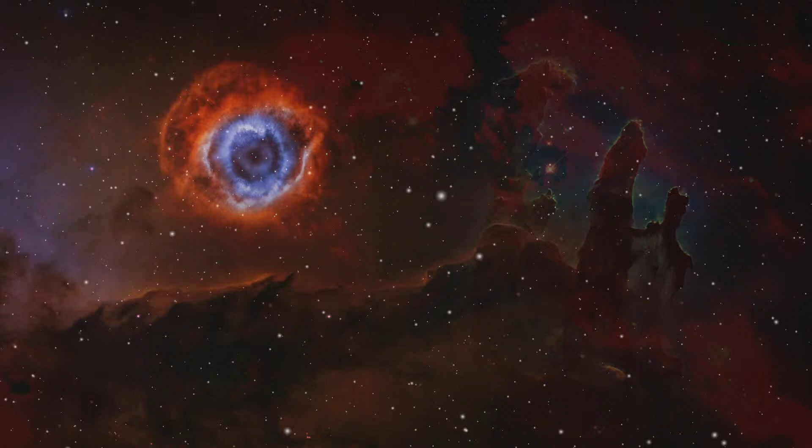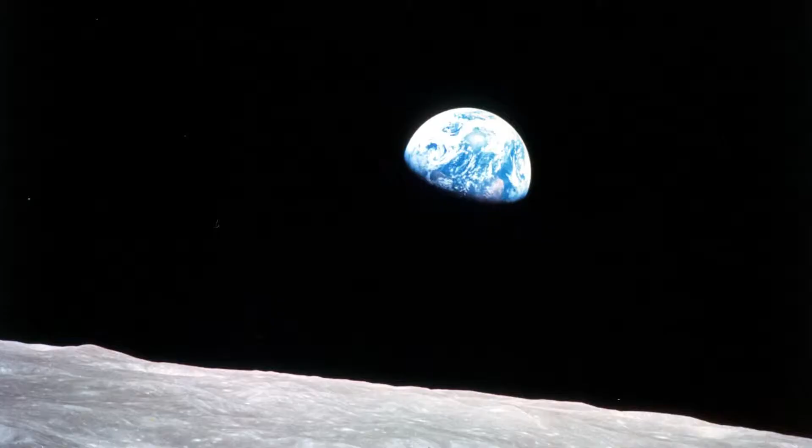This semester's 2110 competition, One Giant Leap, involved designing an autonomous device capable of consistently scoring the maximum number of points per round. There were 4 main ways to score points and win the competition: clearing foam rocks in the lunar module landing zone, preserving the location of the lunar module, placing a flag, and egressing from the lunar ridge. All tasks were to be completed in 40 seconds.

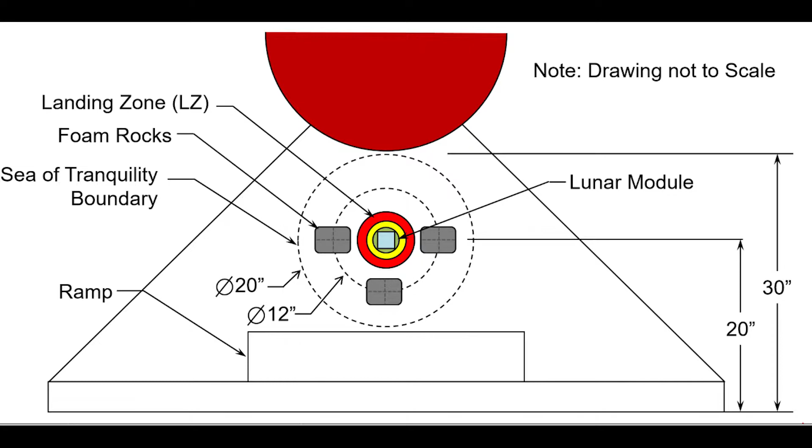The competition was scored using a point system with the breakdown as follows. Successfully activating the machine was worth 10 points. Fully clearing all 3 rocks in the Sea of Tranquility while preserving the location of the lunar module was worth 60 points. Successfully placing the flag in Zone 1 was worth 44 points. And egressing from the lunar ridge doubled the score obtained by placing the flag.

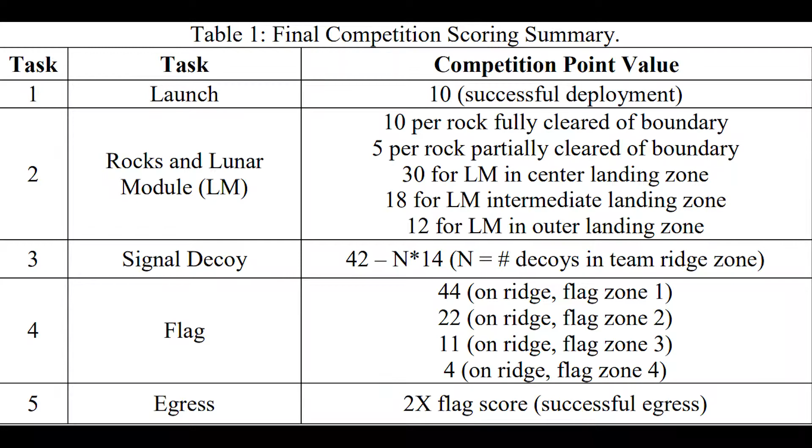Teams received a 14-point deduction per sensor decoy in their zone, but could not be deducted more than 42 points in total. If no decoys were placed in your zone, the highest amount of points a team could obtain was 200. The competition was completed on a 7 by 7 foot track with a 30 by 30 inch starting zone.

The initial state of the machine had to fit within a 1.5 by 1 by 2 foot volume and had to be activated using banana plugs powered by the track. The machine's power sources were limited to components in the mechatronics kit, which consisted of 2 DC motors, 2 solenoids, and a pneumatic actuator. 5 mousetraps and 5 rubber bands were also allowed, and the total cost of the machine could not exceed $100 beyond what was provided in the mechatronics kit.

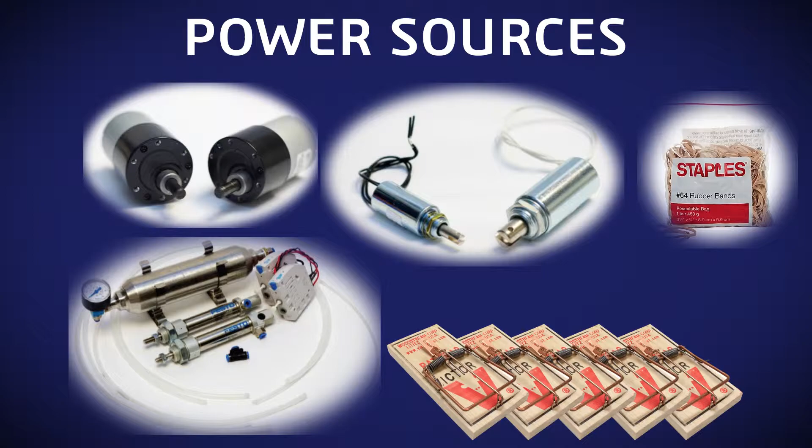The House of Quality highlights 2 very important customer requirements that will result in disqualification if not met: no track damage and starts and stops at rest.

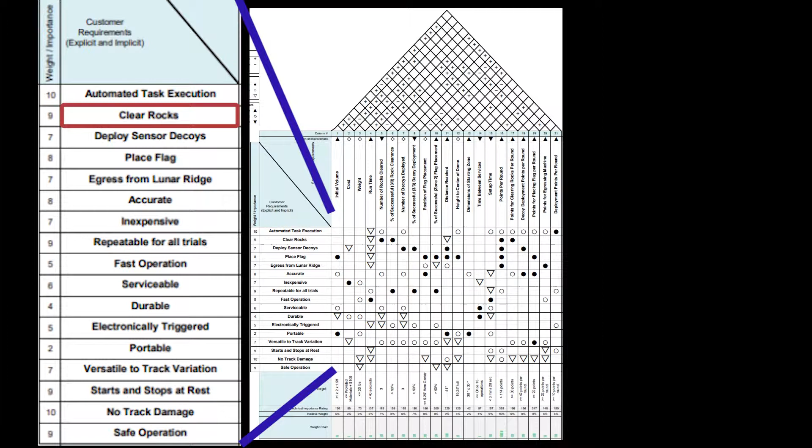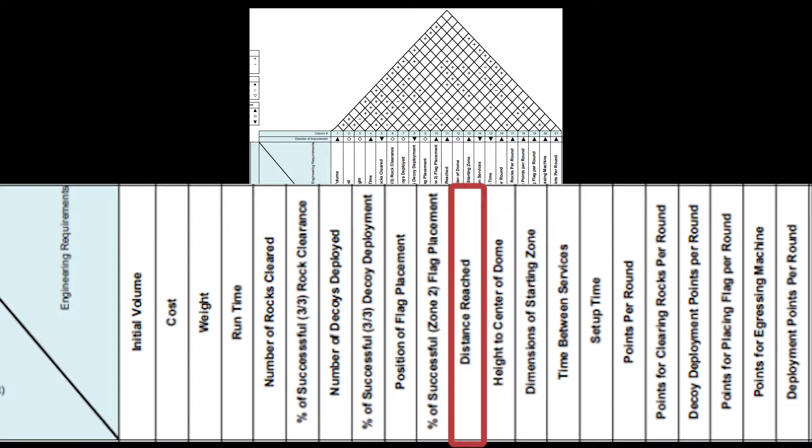Of the major tasks, clear rocks was weighted most heavily due to the large amount of points and how easily obtainable it was, and that it had no dependence on other teams' performance. Another major takeaway of the House of Quality was the importance of distance reached, which was due to its dependence on fulfilling all major tasks, which combined the majority of all total possible points.

The most challenging specification to achieve is initial volume. This is because the design would have to reach more than 41 inches to the center of the dome and a height higher than the initial volume. This means the reaching would have to both overcome gravity and have more than one simple motion for the distance.

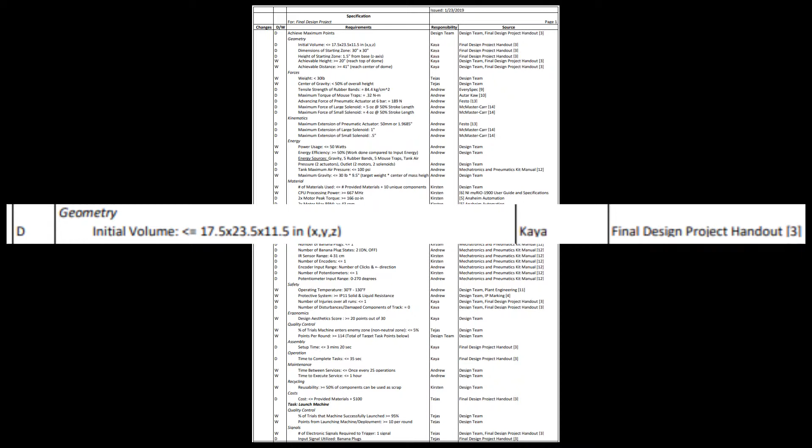The target points attempted are 10 for activation, 60 for the rocks and lunar module, placing all 3 decoys to lower an opponent's score by 42, and placing the flag in Zone 2 for 22 points and 22 for egressing, leading to a final points of 114.

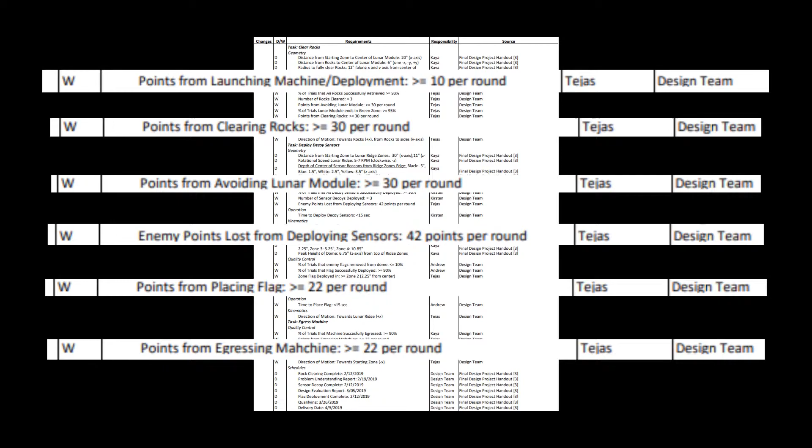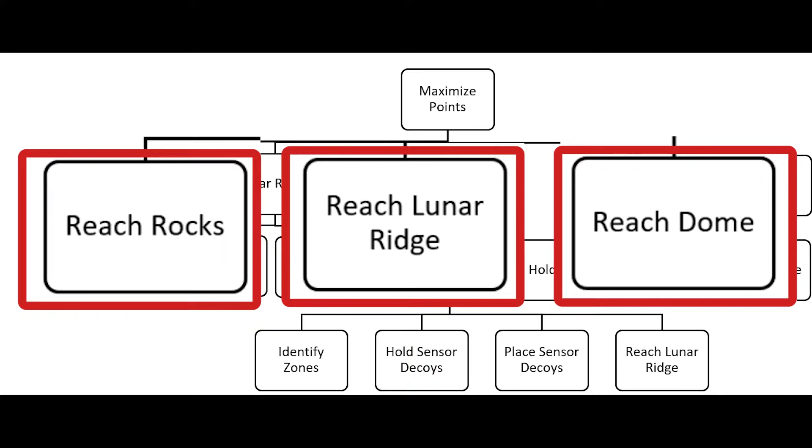In the function tree, the functions reach rocks, reach lunar ridge, and reach dome were all determined to be some of the most challenging. Despite this, they could be combined such that one subsystem could complete them all.

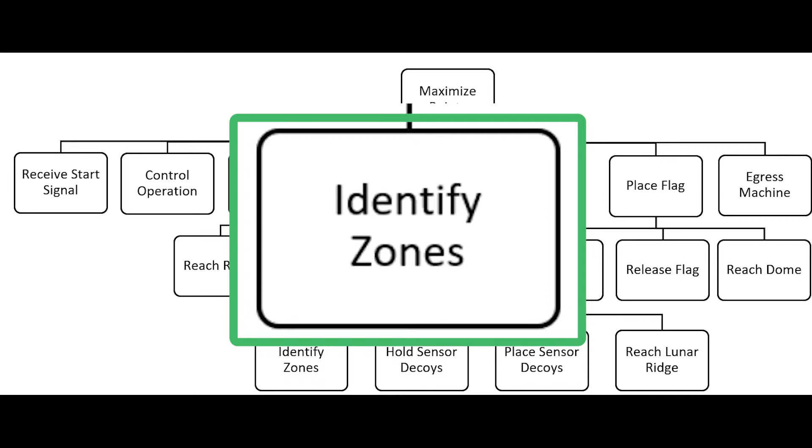Identify zones was another difficult task due to the quickness of the ridge's revolution and the small tangible differences in the zone identifiers themselves. Furthermore, this function is critical to the success of the rest of the deploy sensor decoys subfunctions, adding more importance to it.

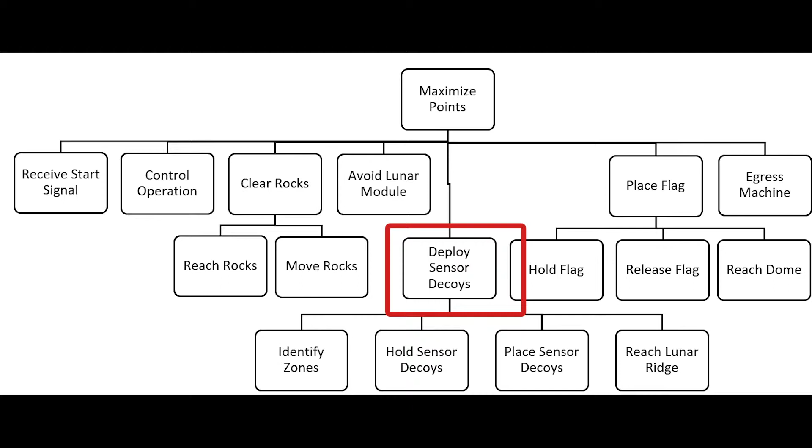For this competition, our main design objectives were stability and reliability. To ensure this, we focused on incorporating mechanical systems that we could easily test and perfect instead of electrical systems that were more likely to malfunction.

The majority of our subsystems consist of simple mechanical components, such as utilizing a wheel at the end of the joy slides to stabilize the machine against the rotating lunar ridge, and using a mousetrap to power the flag arm instead of a motor or another sensor, and a lever system used to deploy not only the joy slides but also to deploy the sensors.

By designing simple and reliable systems, we were able to produce a functional and consistent final product. Our final design, Slide Rule, is made up of 4 main subsystems that score an average of 114 points.

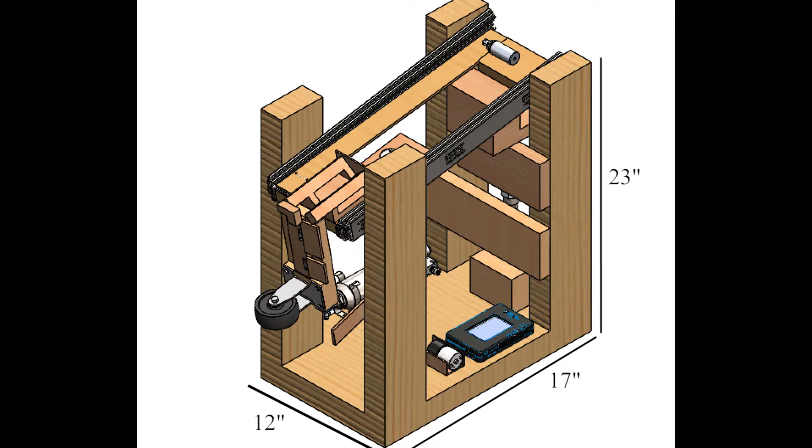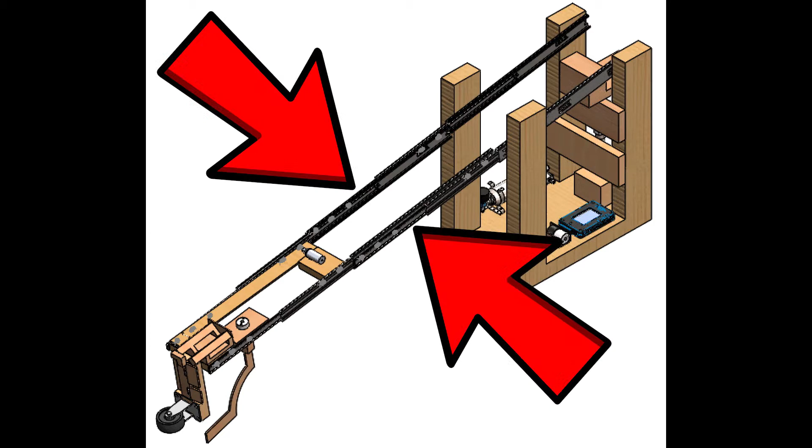At the start of each round, the system is activated by a lever located at the back of the robot. The myRIO is programmed to release the actuator that will extend it upwards, pushing the lever down and releasing the joy slides. The 2 connecting sets of joy slides mounted onto the robot base at a downward angle will then extend towards the rotating lunar ridge due to gravity.

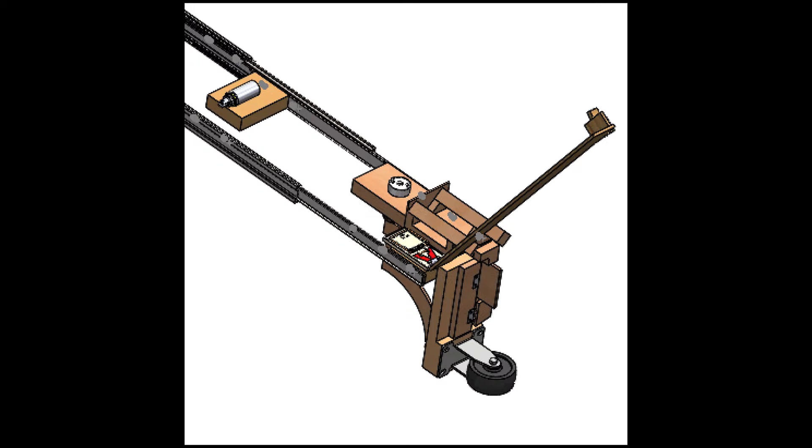This motion comes to a stop once the wheel at the end of the drawer slides comes into contact with the lunar ridge. This wheel is a significant part of the design because it accurately and consistently locates the lunar ridge and provides a reference point for deploying the sensor decoys and flags without moving the robot itself.

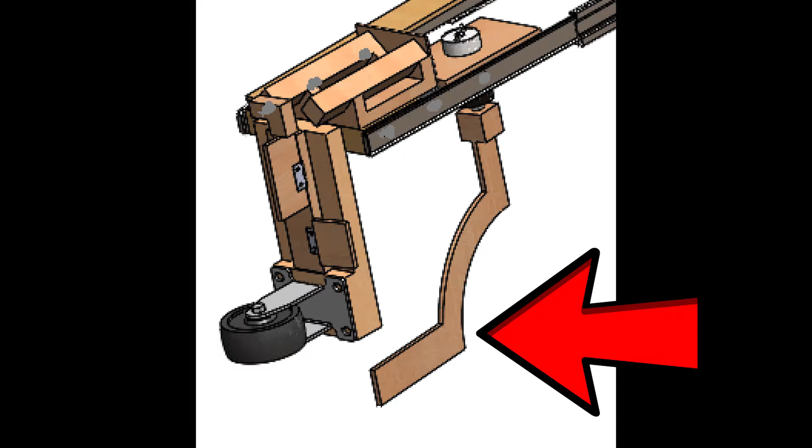Once fully extended, the rock clearing subsystem is activated. Using a specifically designed curved arm, the motor mounted onto the drawer slides rotates the arm 360 degrees for 8 seconds, effectively clearing all of the rocks while avoiding the lunar module. Simultaneously, the sensor decoy subsystem is also activated by the beacons protruding from the lunar ridge.

Again, relying on a mechanical solution, the triggering mechanism is a swinging arm system with two settings that account for the different zones on the track. Depending on the team's specific starting zone, the sensor decoy subsystem can be set to deploy on either the top two beacons, sending decoys into the yellow or white zone.

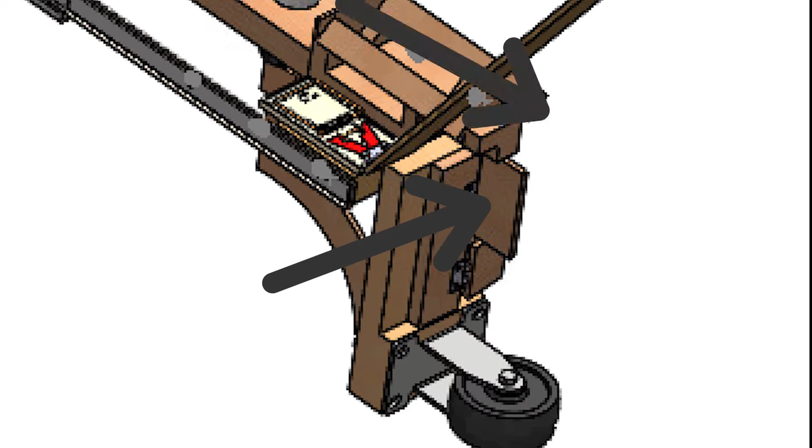Or the bottom two beacons, sending decoys into the black or blue zone. Upon the start of each round, one of the two flaps will be extended, supporting the small arm holding back the decoys on the machine. Once extended to the lunar ridge, a rotating beacon will push the flap back and release the decoys into the zone.

The last subsystem to activate is the flag. Specifically programmed on the MyRio, the arm release is delayed in order to optimize flag placement. By waiting, we minimize the chance of other teams knocking our flag out of the way. This subsystem also incorporates mechanical aspects in that the arm's motion is powered by a mousetrap.

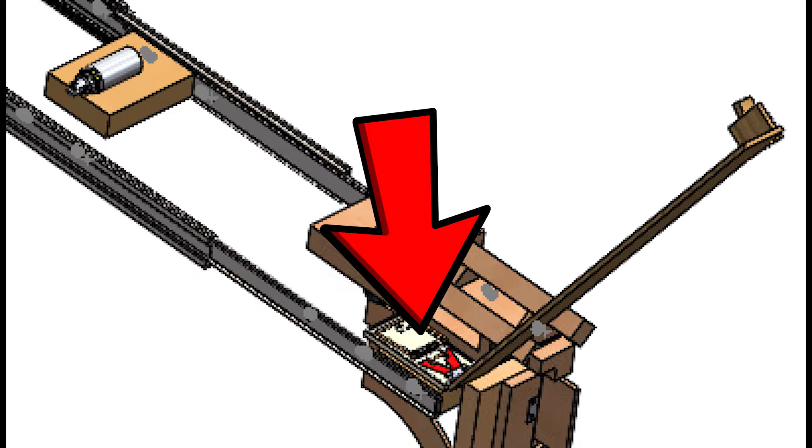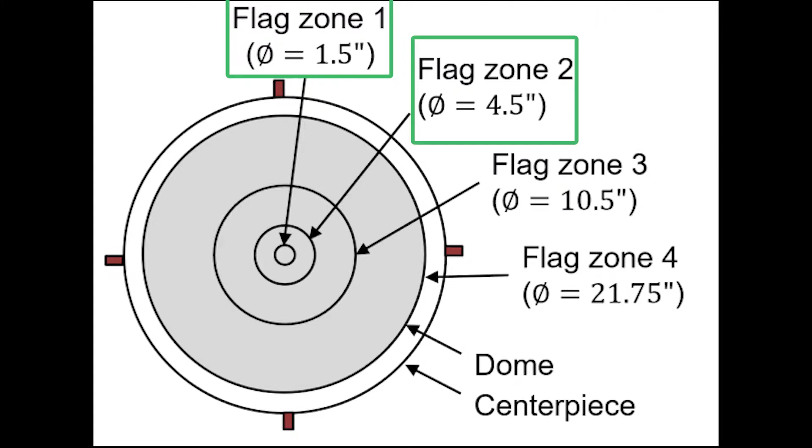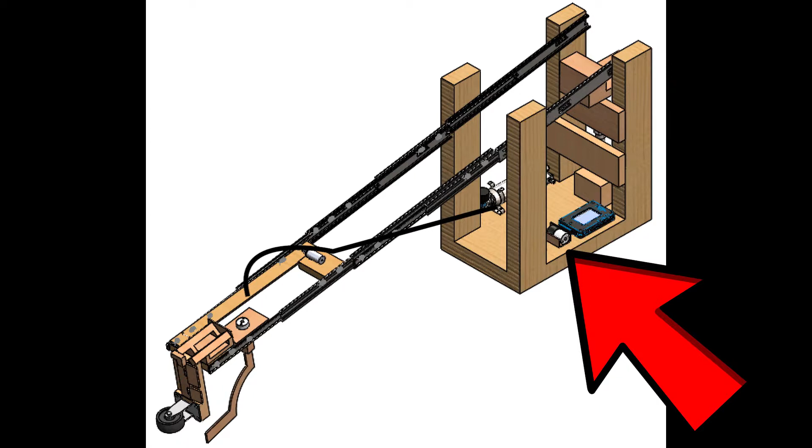The end of the arm is held in place by a solenoid until it is activated, when the arm will release towards the lunar dome. The placement and the angle of the arm ensures that the flag will consistently land in Zone 1 or Zone 2 on the dome. Shortly after the flag is placed, the robot will egress from the lunar ridge through a string and motor system. The string is attached to the robot's base and to the flag arm and will remove it from the lunar ridge.

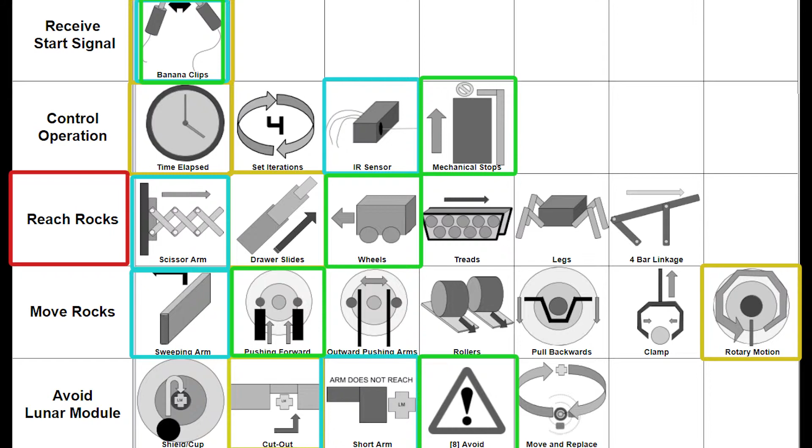Overall, this design was the most effective and consistent combination of mechanisms that successfully completed all of the tasks. The morphological chart, shown here in parts, displays the designs chosen for the final design, slide rule, boxed in yellow. The designs chosen for the two alternate designs, Edward's Scissor Arm and Mario's Cart, are outlined in light blue and green respectively. Additionally, the challenging subfunctions identified earlier are highlighted in red.

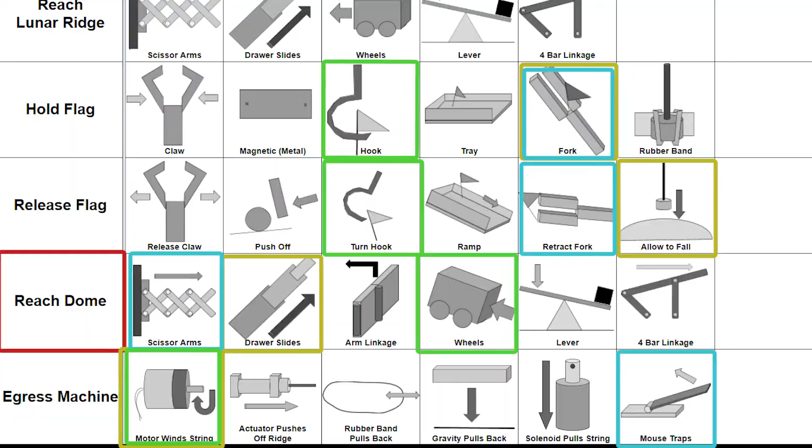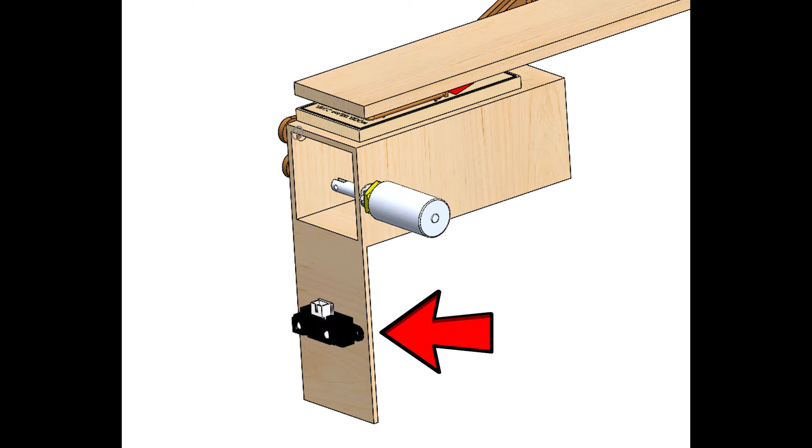Edward Scissor Arm's design revolves primarily around its extending scissor arm, which houses both the sensor decoy and flag task subassemblies. Once extended, the IR sensor will detect the zone, causing a solenoid to retract and the decoys to fall. Simultaneously, the mousetrap will trigger via a string and motor and place the flag on the dome. While this happens, the rock arm will be released via the same string and knock two rocks out of the zone.

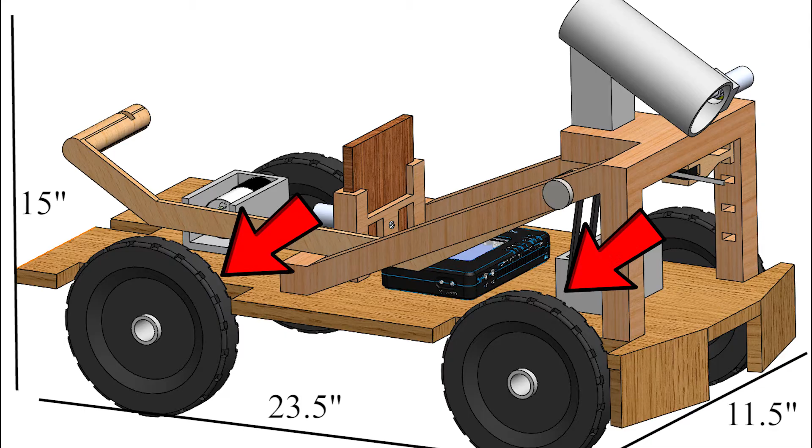The driving principle behind Mario's Cart is its wheel design powered by a motor and pulley system. This will propel the device forward, allowing the angled front pieces to push the outer rocks away. Once the device has reached the lunar ridge, the long arm switch will detect the desired zone, deploying the sensor decoys from the decoy holder.

A motor will propel the flag arm to the center of the dome at the same time. Before the drive motor reverses direction, a solenoid will retract to drop the third rock wall down, which will displace the third rock during egression.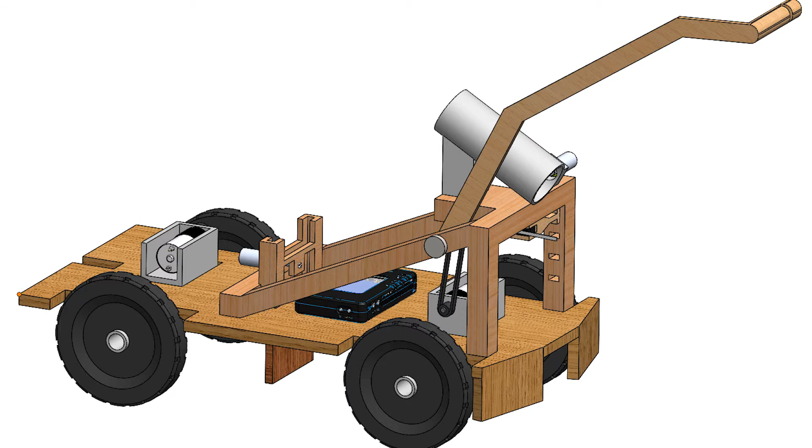A third-level evaluation matrix was created in order to compare and contrast the features of the design concepts. Slide rule was chosen because it scored higher than both other designs in many requirements, accuracy being an example. It also scored consistently high in the task-related requirements, which were weighted heavily due to their involvement with scoring points and winning the competition. The only requirement in which slide rule had below a 3 on a 0 to 4 scale was inexpensive. This was due to the cost of the drawer slides, costing approximately $40 total.

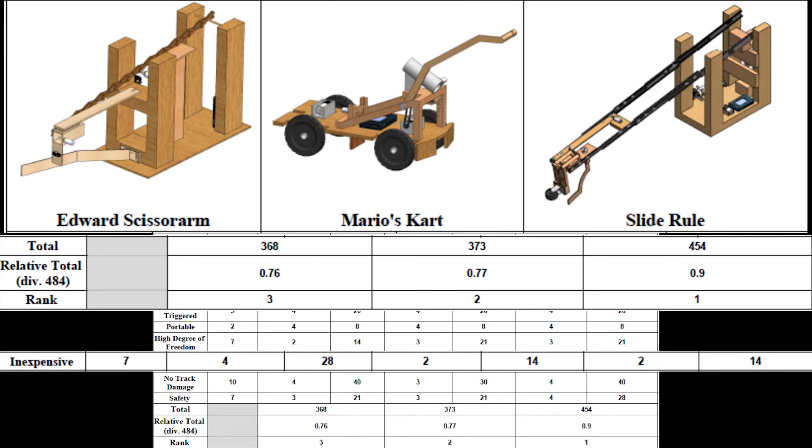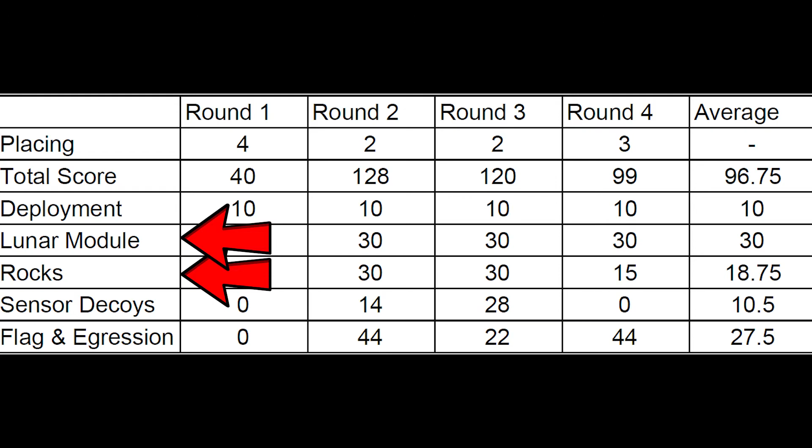Other than the first round, the device performed well, allowing for the advancement to the fourth round. This placement is likely due to the rock and lunar module tasks, which scored very consistently. In the first round, judging interference meant that our device did not deploy, and the device was awarded only the points for deploying and leaving the lunar module untouched.

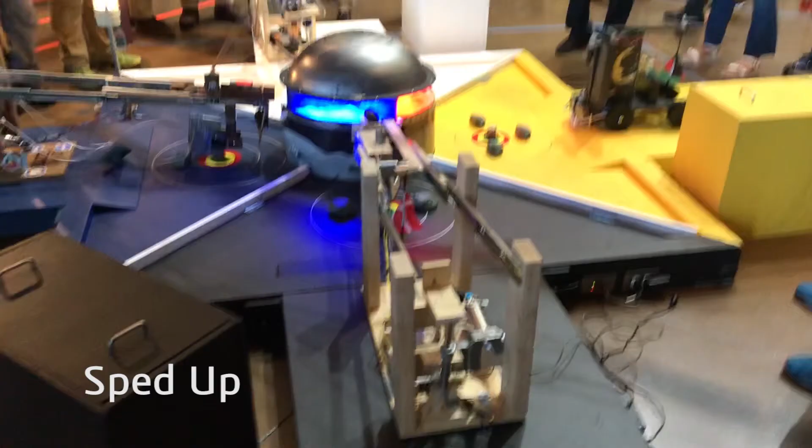In the second round, the device deployed correctly, and all the subsystems worked as designed. A stray, knocked-over flag interfered with the device's flag placement, but the target score was still achieved. In the third round, the device performed as expected again, with the exception of the flag arm planting the flag in Zone 3 instead of Zone 2.

In the fourth round, the rock clearing and sensor deployment systems failed to activate properly, leading to a lower score and placement, and thus elimination from the final competition.

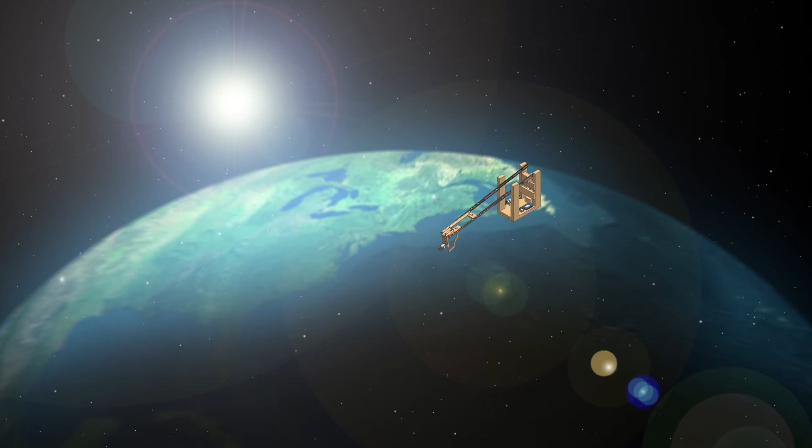We learned a lot throughout the design process, especially the importance of testing. In the end, the robot was able to accomplish all the tasks we initially attempted. However, it suffered from a couple problems. First, many mechanisms were prone to human error, like the sensor decoy stopper, which wouldn't fall if decoys weren't placed loosely enough. Here, we just had to have the angle steeper.

Another problem was in round 4, when the rock arm got stuck on the lunar ridge. We could have just made the rubber band looser so it could bend more easily.

Advice to future victims of 2110 would be: 1. Make boxing easy. The last thing you want is to be struggling during competition. 2. Don't assume anything will work until you test it. And 3. Test activation thoroughly. We learned this the hard way, but it always sucks to get 0 points over something so simple.